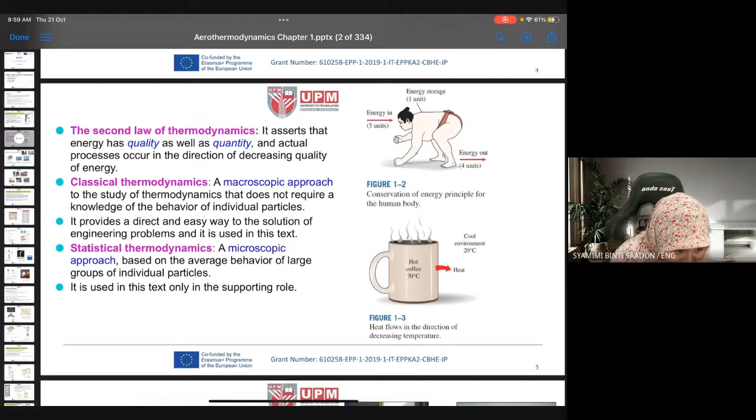Number 5, okay, second law of thermodynamics. So the definition of second law says that energy has quality as well as quantity. An actual process occurs in the direction of decreasing quality of energy. Understand? Okay, it's a bit complicated, the definition, but it's like this.

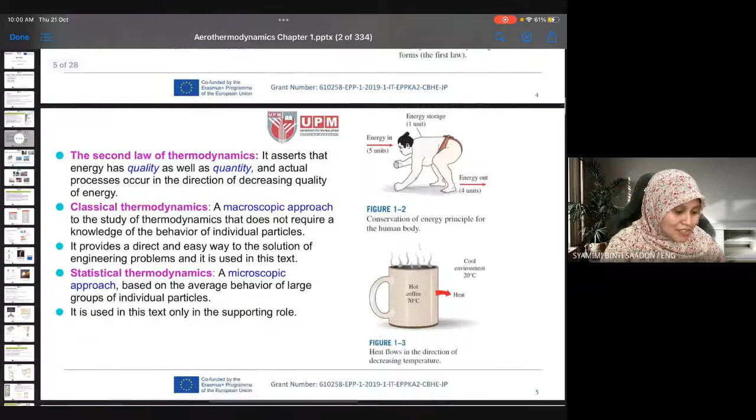Simple definition first. So if we only apply the first law, energy means that we calculate how much energy our body can produce, how much energy the gas turbine engine or the power plant can produce, etc. But actually not all of the energy produced is being really used.

Maybe we produce 100 joule of energy, but not all of this 100 joule is going to be well used, transformed into work, used by the human or by the machine. So the actual percentage or actual part of the quantity of energy that is being used, maybe like 70 joule, only 70% or 50%, right? So that is what the second law of thermodynamics means.

So the second law of thermodynamics measures the actual process, the actual quantity of energy being used or that can be used. Because sometimes we produce 100 joule, but part of it is like waste energy, it cannot be used. Maybe the energy is a low grade energy, meaning the temperature is not very high, so it's like waste energy. So only the amount of actual energy that we can actually use is accounted for by the second law of thermodynamics.

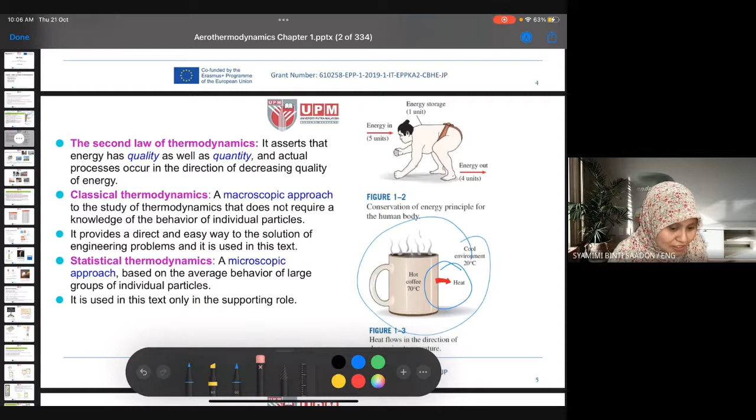Macroscopic approach to the study of thermodynamics does not require a knowledge of the behavior of individual particles. There are two methods to understand the thermodynamics process: one is macroscopic and another one is micro.

When we want to solve thermodynamic problems, firstly we have to identify what is your system, the closed system. For example, this hot coffee - our system is the cup, the hot coffee, the mug, and the cool environment, meaning the environment at the surrounding only, not the whole room which might be 20 meters square. You only consider maybe 2 times 2, 4 meters square. Even though the room is big, the system that you're going to study, to analyze, is only this system.

So when you want to solve thermodynamic problems, first you have to state what is your system. In your exam or test or in future, you state first the system - the closed system that we are going to consider is hot coffee and the surrounding environment near the hot coffee, maybe around how much area. You precise the area, so we only consider that.

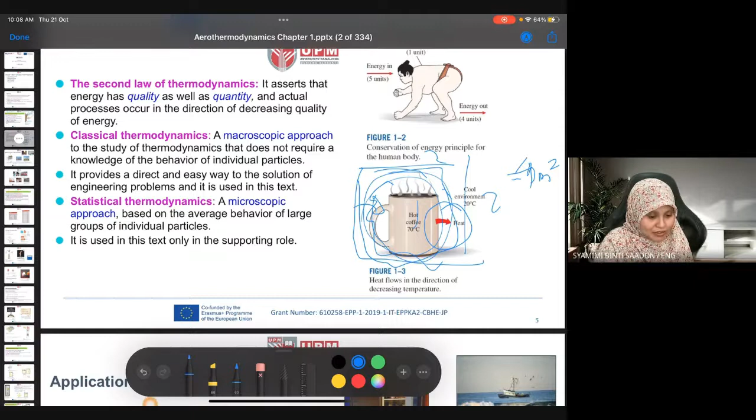Okay, later we will learn more about this. This figure 1-2, what is it? Conservation of energy principle for the human body.

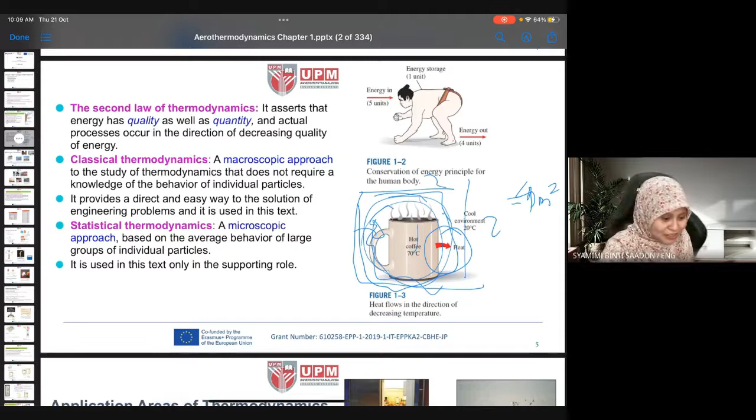Even us, human body, we also transform energy. Meaning that we eat a lot - for example we eat our breakfast, nasi lemak, roti canai, and then we use the energy from the breakfast that we ate. The calorie is being burned and we use that calorie for our energy, to study or to exercise or to do anything. So the energy is being transformed from the chemical process of the food that we ate to the physical energy of the human body.

Okay, next, this is some application area of thermodynamics. Maybe later we take another rest at 10:30 or so. Okay, in 5.

Application areas of thermodynamics. So this is an example - figure 1.4, a house, residential building.

Like I mentioned just now, if one day you want to work in the renewable energy or sustainable energy area, you want to design something - maybe some of you will not work in the aircraft area or aerospace area, but you want to work in the renewable energy or sustainable energy area with TNB or anything. Because you have learned thermodynamics, one part of it, you can work in that area also.

So what does this thermodynamics do? For example, we design many engineering systems such as the solar hot water system, which involves thermodynamics. So in order for you to design a house, a residential building with renewable energy or sustainable energy, energy efficient system, you want to include solar hot water in your house shower, solar photovoltaic panels at the rooftop, to use solar PV, more clean energy.

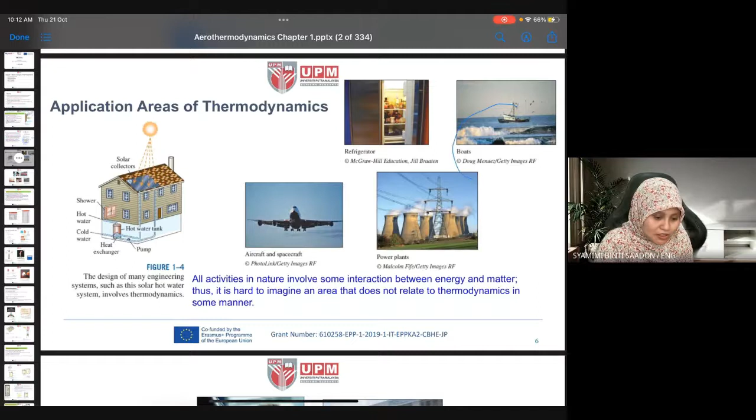Boats also - the mechanical movement is the same as any other vehicles, so how are you going to operate the boats? And then aircraft, of course, this is your main part - aircraft and spacecraft. We will learn about the application of thermodynamics in the propulsion system of the aircraft, the engine - turbofan normally. In civil aircraft we normally use turbofan. And power plants.

The gas power cycles that I mentioned at the beginning can be applied in aircraft or power plants - industrial power plants. You want a power plant for industry, so you need to understand the gas power cycles process, because gas power cycles are applied in the power plant industry process, same as aircraft. So these are some, not all, of the applications of thermodynamics related to energy.

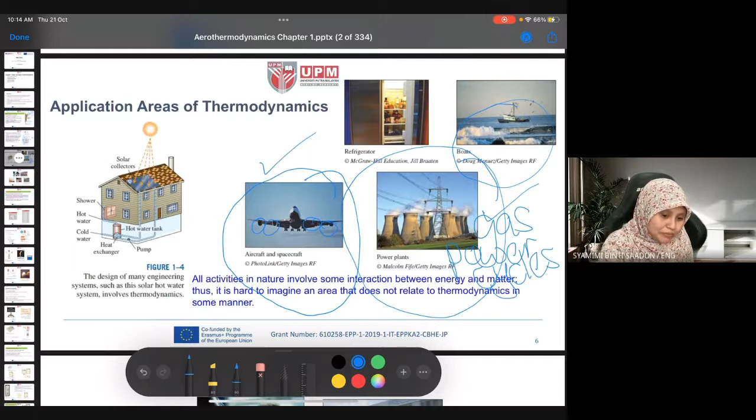Wind turbines, another concept of renewable energy. Solar, just now, is from the sun - the heat, the thermal energy from the sun is transformed to heat and electrical power. Here, wind turbines, we use the wind energy. If the wind is strong - but normally in Malaysia there's not that much, because our climate and wind speed is not really very strong for us to use wind turbines, wind energy.

So wind turbines transform the wind energy, the wind power, to electricity, to power, by using turbines. The turbine is the device that transforms the process from wind energy to electrical power or mechanical power.

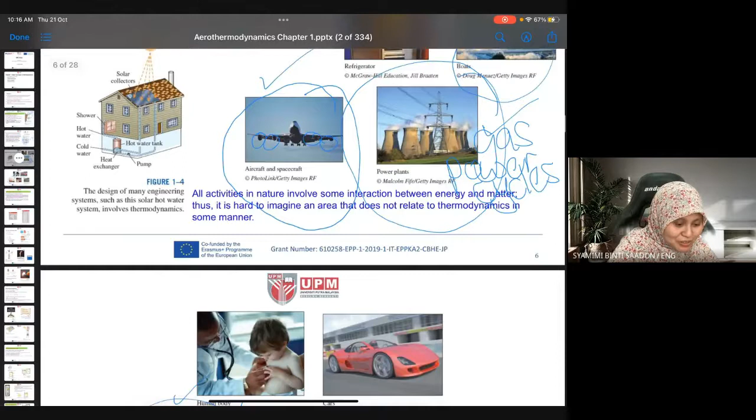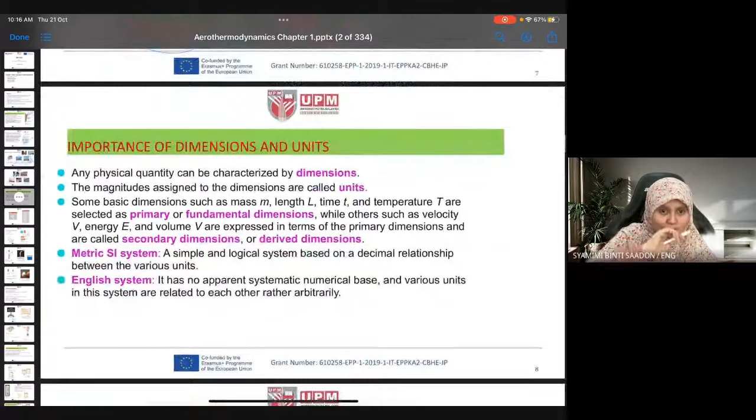So that means in the future, it doesn't mean you can only work in the aircraft, aerospace area - you can also work in all of these areas: wind energy, piping, hydraulic, etc. Actually mechanical engineering - because aerospace is part of the mechanical engineering area, one of the specific areas in mechanical - mechanical is actually a very broad area, so don't worry, you can apply it in a lot of applications.

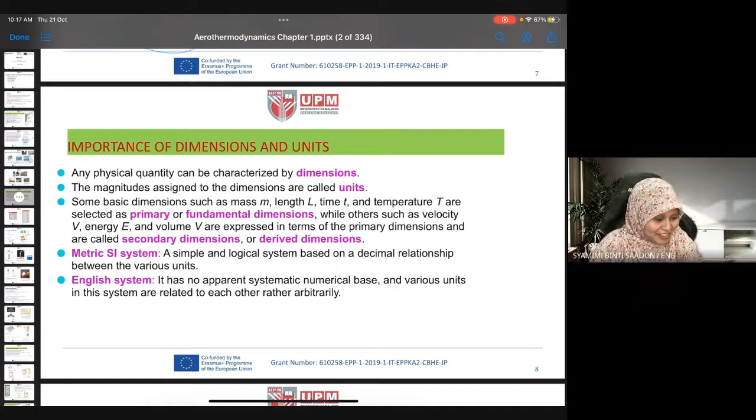Okay, next is dimensions and units - this is a very simple one. Any physical quantity can be characterized by dimensions, so anything physical that we can measure - the magnitude of this dimension is called units.

For example, temperature - the unit is Kelvin, degree Celsius. Distance - the dimension is distance, the unit is meter, kilometer, centimeter. So some basic dimensions you already know: length, mass, time, temperature. Then we have primary and secondary dimensions - secondary like volume, energy. This secondary dimension is derived from the primary, basic dimension.

And then the unit that we normally use is SI units. The English system is sometimes used, like Fahrenheit, pound. But sometimes we have mass in pounds and have to convert to SI, which is kilogram. So you need to know, especially for the basic dimensions, what their SI units are.

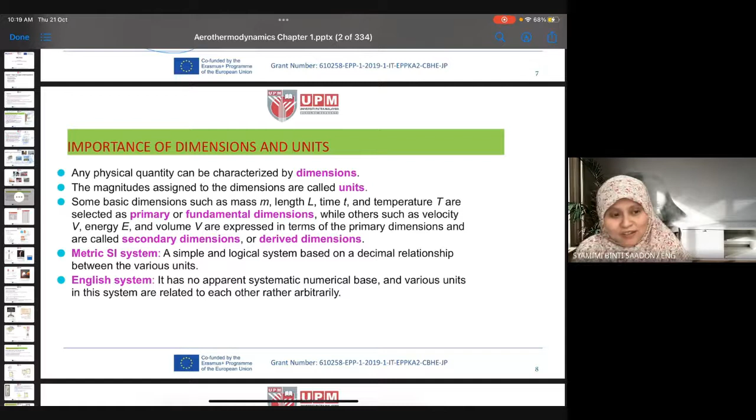Yes, doctor. What is the SI unit for mass? Newton? Oh, sorry, that's for force. Unit for mass... Kilograms. Okay, kilogram. Not gram. So that one, you have to be alert.

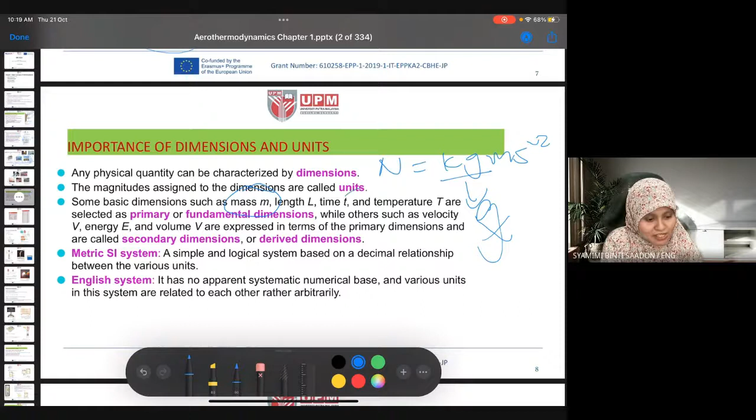All of you have to be careful, it's not gram, it's kilogram, because when you calculate energy or force, Newton is in kilogram meter per second squared. It's not gram. And then length is meter, time is second, the SI unit is actually second, not minute or hour.

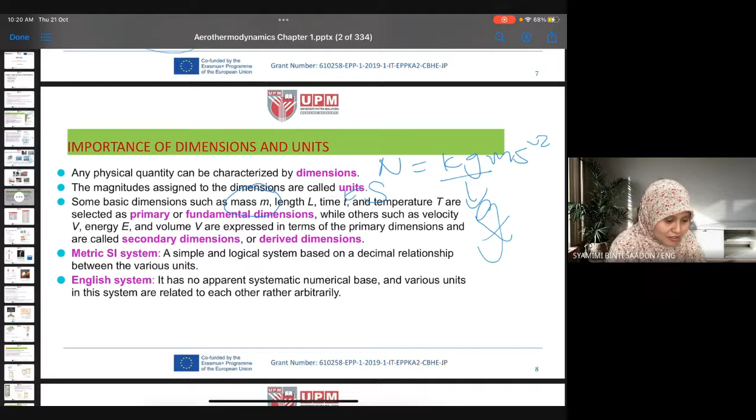Okay, these are the units. Okay, so at least you know this one. Remember this one up to giga or mega here, the ones that we are going to mostly use - centimeter, micro, maybe. All the units, millimeter is how much? 10 to the power of minus 3 or minus 2. That one you have to remember.

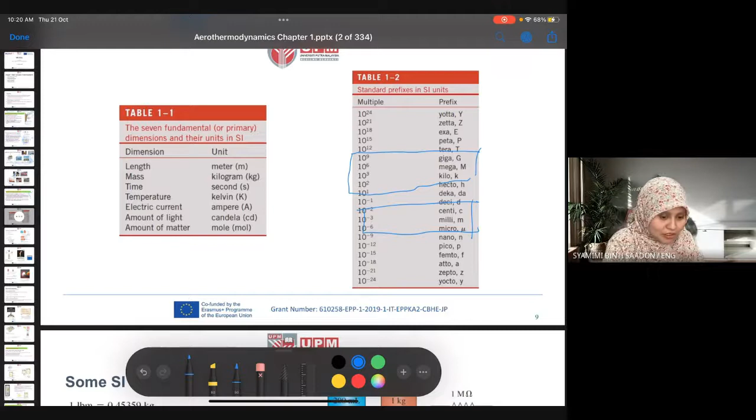Some SI, so this example is SI versus English units. Like I mentioned just now, the English unit is pound mass. So pound mass is equivalent to 0.45 kilogram, or 1 feet in English, the SI unit is 0.3 meter.

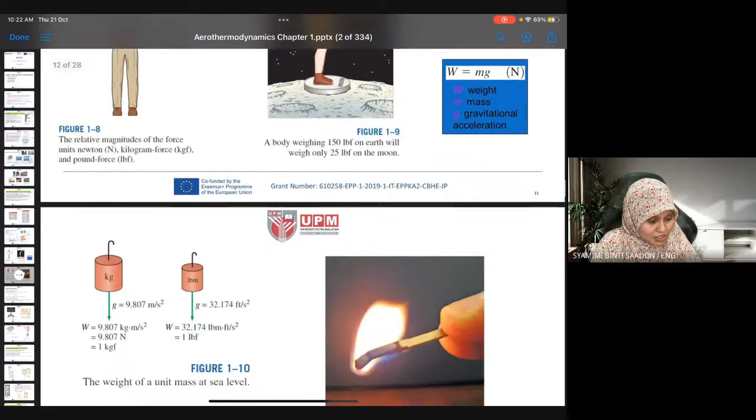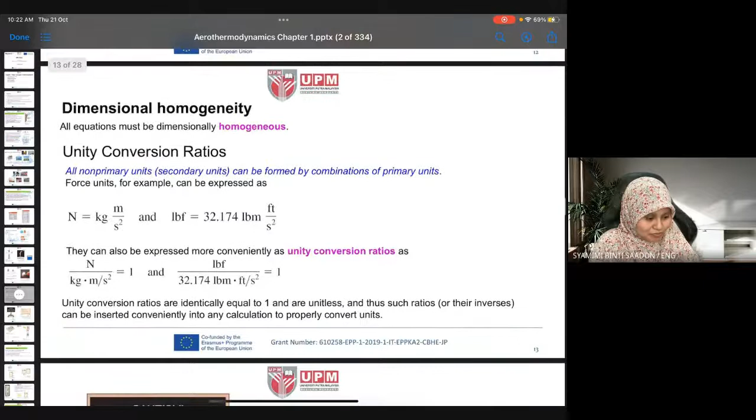The weight of a unit mass of a substance. Okay, never mind, pass. Conversion ratio, never mind. Sorry, when I say pass it means okay, you can just review it.

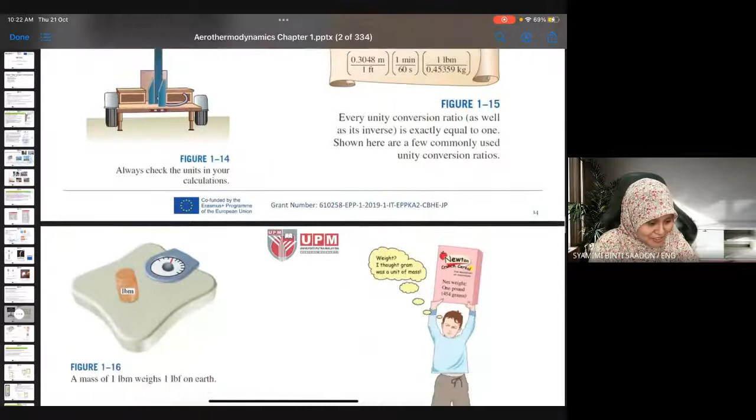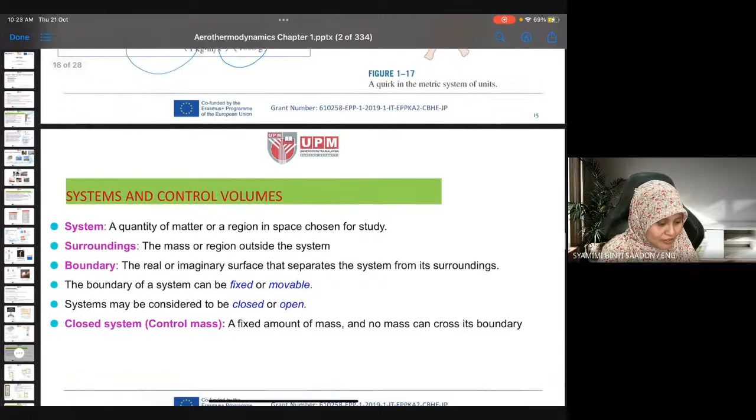This one, system and control volume. So a system is a quantity of matter or a region in space chosen for study.

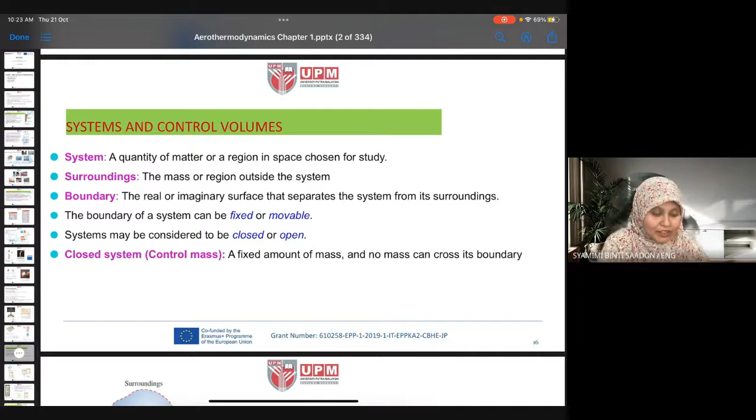Like the example of the hot coffee just now - the coffee and the surrounding. So we choose this as the system that we choose to study. So a quantity of matter or a region in space chosen for study - this is a system, a closed system that we use. But you need to remember what this is.

This one is a closed system. But for a closed system, control mass, it's a fixed amount of mass and no mass can cross its boundary. A system is a quantity of matter, but there are two types of system - closed system and open system. Closed, open, open, close.

A closed system is where we consider that there is no thermal exchange or anything being exchanged in and out of the system. For example, if we consider this area, the coffee and the surrounding area, not the whole room, just the surrounding area of the coffee, is our system that we're going to study and analyze. If we consider it a closed system, it means we don't take into consideration the energy or thermal exchange, the work exchange in or out of this system. You only consider inside here, not outside. It means there is no mass or energy crossing its boundary.

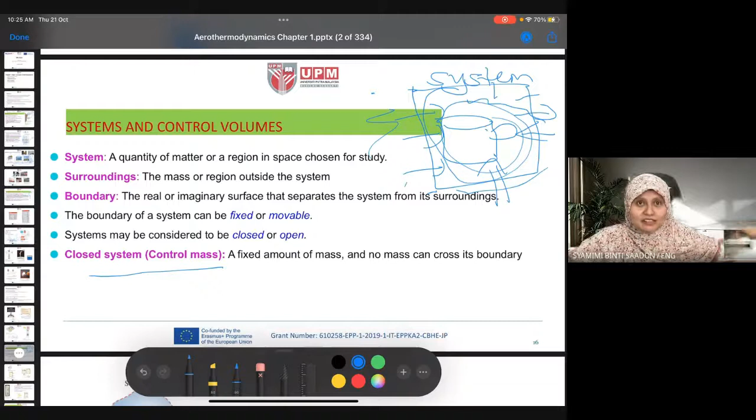But if it's an open system, for example, the aircraft engine - the thermodynamic cycle, the gas power cycle of the aircraft engine, is an open system. It is not closed, obviously, because you imagine the aircraft engine in the air, so it is open.

Okay, so you still have to define the system of the engine aircraft, but when we say that it is an open system, it means that we have to take into consideration the change of mass, the change of fluid outside the boundary of the system.

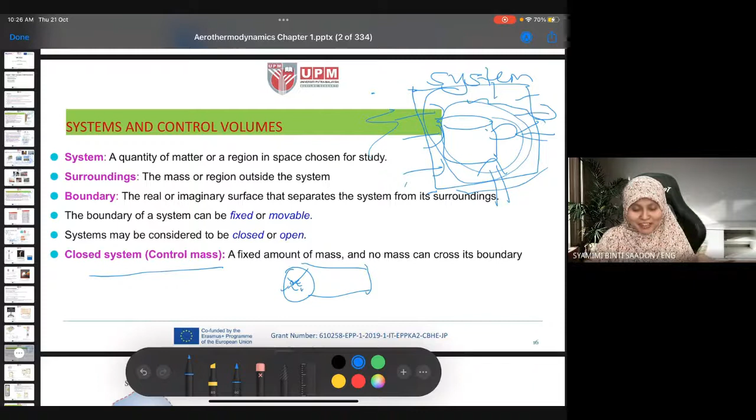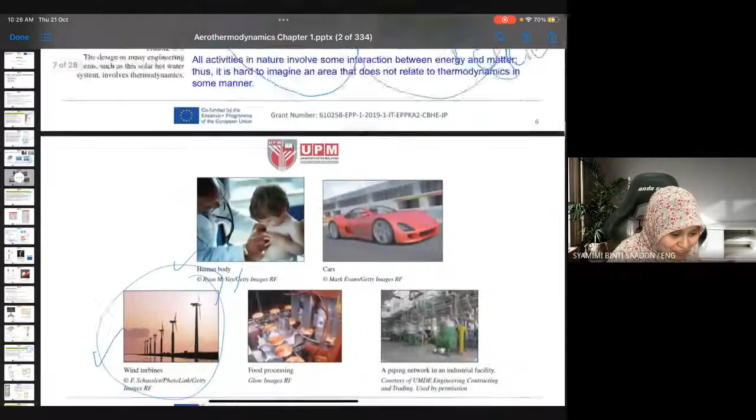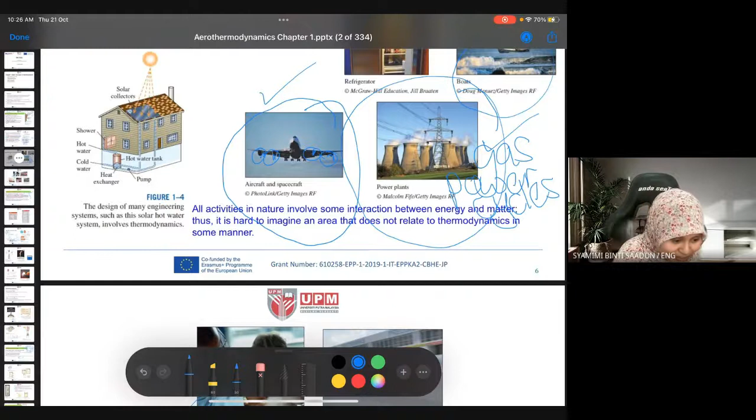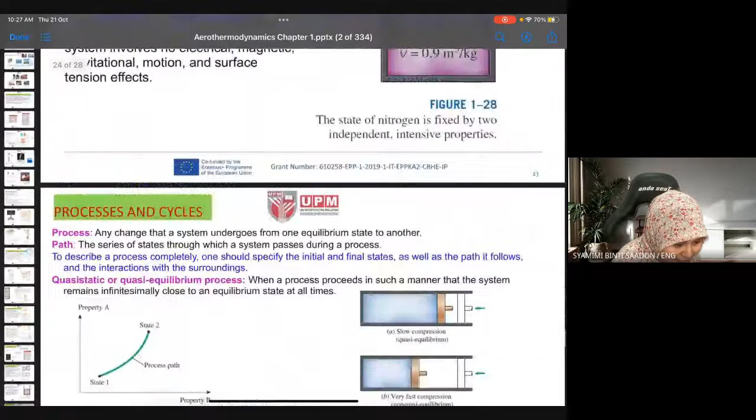So, mana tadi? Okay, this one. So engine, turbofan engine. So okay, this is our system, the aircraft engine.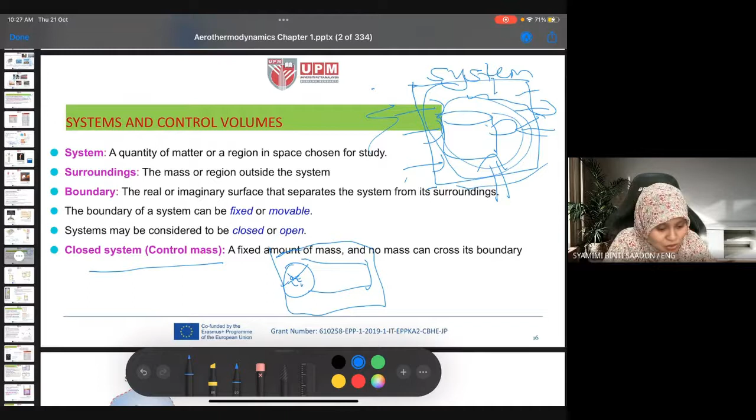But since it is an open system, we need to consider the fluid, the transfer of mass at the boundary also. Means that if there is any change in the air surroundings, we have to take that into consideration, the force that is applied near the engine, so in and out, etc. So we have to take that into consideration if it's an open system.

Okay, back to surroundings, the mass outside the system. Boundary, the real or imaginary surface that separates the system from its surroundings. Okay, so this is the boundary. Means that the boundary is not a physical thing. We cannot see the boundary. It is us who define the boundary.

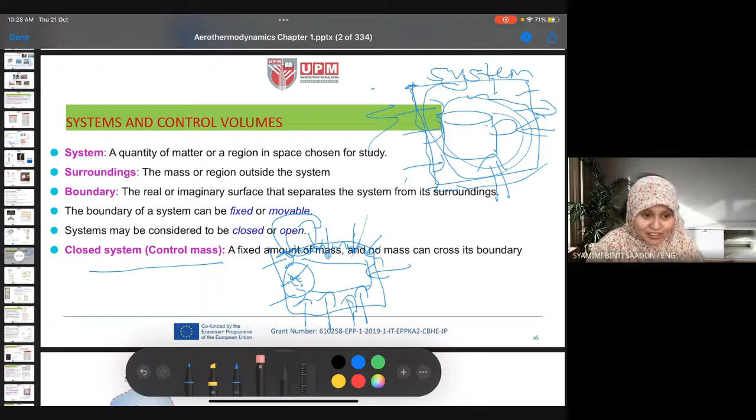We define, the scientist, the engineer, we define the boundary that we want to study. The boundary is not real in real life. Actually it is not real, but we define the boundary. So the boundary is the real or imaginary surface that separates the system from its surroundings.

Okay, or sometimes it can be real. For example, if my system is the whole bedroom, my room here, the size of the room, the area of the room, is my real boundary. Okay, so the real or imaginary surface, and then the boundary of a system can be fixed or movable. Normally in thermodynamics we use the fixed boundary, so it's easier for us to define. Movable is more complicated.

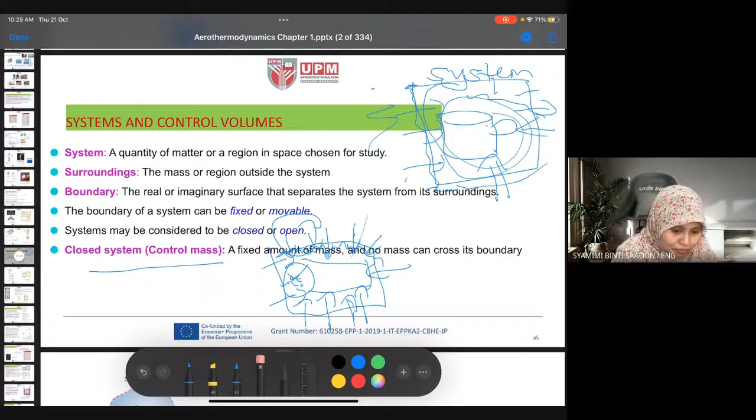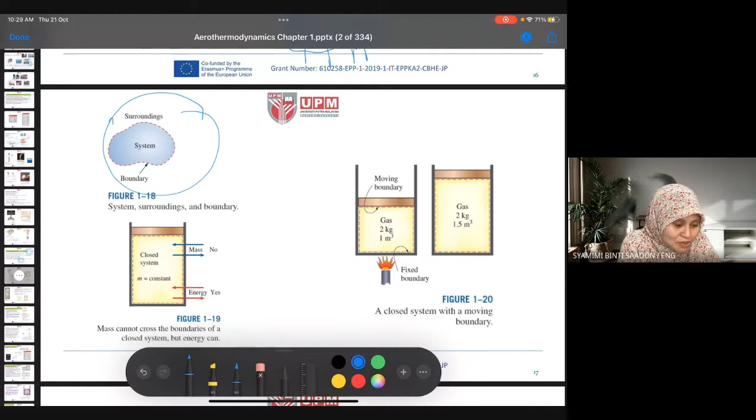A system may be considered closed. Okay, so this one, ada pun gambar. So you imagine you have a system. The system can be any shape, okay, systems. So this is your system. So the outside here, the ambient, is the surroundings, and the dotted red lines are your boundary, okay.

Okay, so this is a closed system. Mass cannot cross the boundaries of a closed system, but energy can.

Okay, so for a closed system with a constant mass, the mass means here that the particle, any particles or any fluid, cannot cross the boundary. If you have this closed system as your boundary, it means that other particles or other fluid cannot simply go into here. So there is no mass transfer.

But energy, yes, energy can change in the closed system. So that's why, like the cup of coffee just now, even though the cup is like that, it can still change energy with the surroundings.